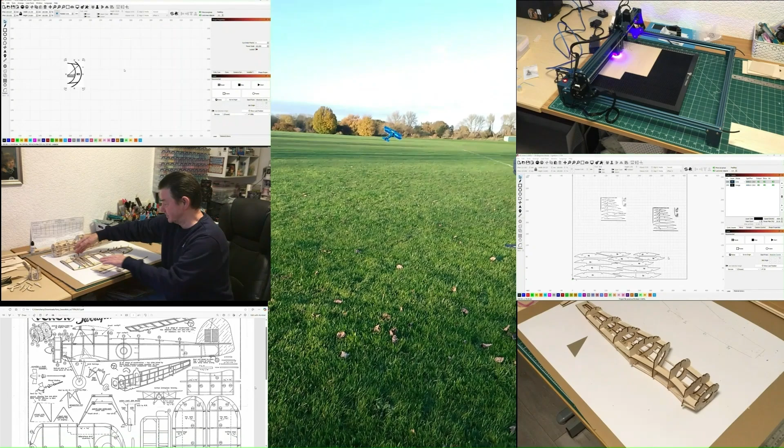Okay, so we're going to start building the tail plane, or the rear stabilizers. The tail plane would be the horizontal stabilizer, and the fin and rudder would be the vertical stabilizer.

The way to calculate the size and positioning of the tail plane would be using mathematical calculations such as tail volume coefficient for the tail plane, etc. But we're not going to do that, because we've followed simple rules for the aeroplane, the fuselage, and the wing. We're going to carry on using simple rules for the tail plane and the fin and rudder.

So the tail plane should be somewhere between 20 to 25% of the surface area of the main plane. Whatever the wing is, the tail plane needs to be 20 to 25% of that generally, depending on the length of the fuselage, etc.

But since we've gone with simple rules, we're going to maintain those and carry on in that vein. So the fin and rudder, or the vertical stabilizer, needs to be 10 to 15% of the surface area of the wing.

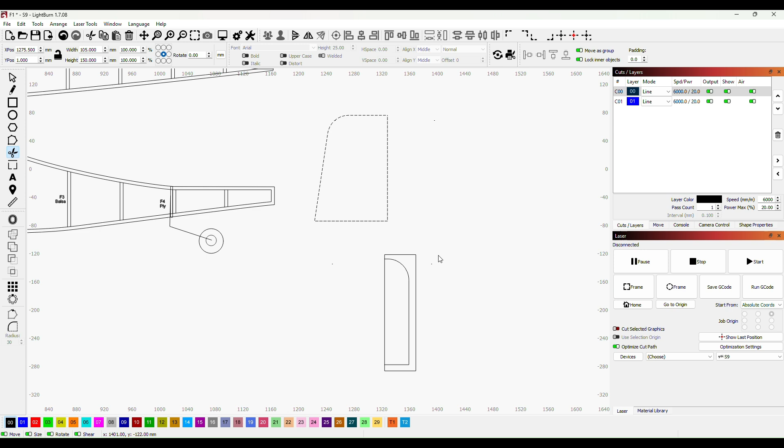And then all we're going to do is copy that, produce another, and using the snipping tool, I'm going to create our two components here. And it's as simple as that.

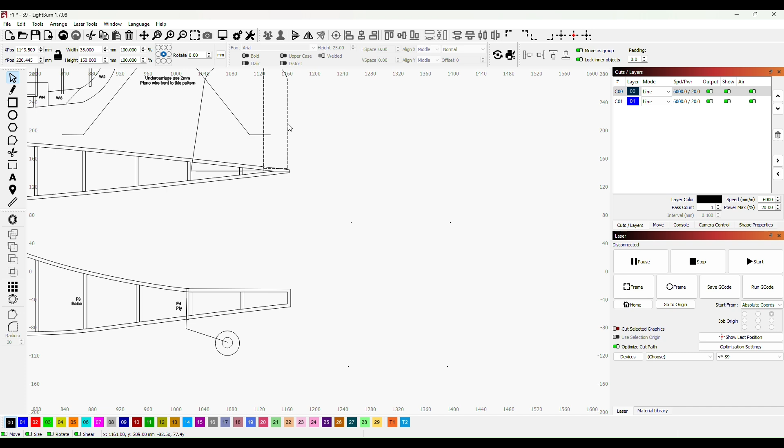Where this is going to sit on the fuselage, what I want to do first is just shape this front end a little bit. I'm going to go to nodes, insert a node here, and straighten that so we've got a straight bit which will sit up against our edge, our stop, when we finally build the fuselage.

And at the back here, what I want to do is make a little bridge there. Now this needs to be 5 millimeters wide, which it is. The reason I'm doing this is because I'm going to have a strip of carbon coming across here connecting both sides of the elevator, and that strip of carbon I've got is 5 millimeters wide.

So all I'm going to do is bring this shape up, and sit it right there, and that goes outside of the shape of the fuselage. Probably doesn't need to be quite that big, but there you go, that will do.

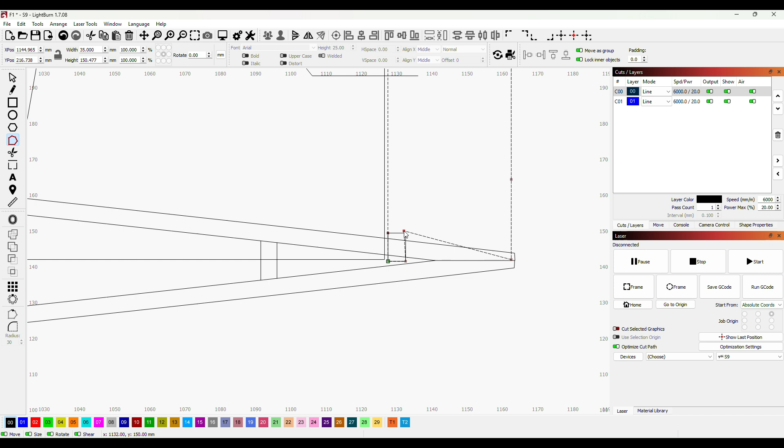And then I'm going to go back to nodes, insert a node, and insert a node there. I'm going to insert a node here, insert a node here, and then delete that node by highlighting it and pressing D, and then we get the shape of our elevator forming there.

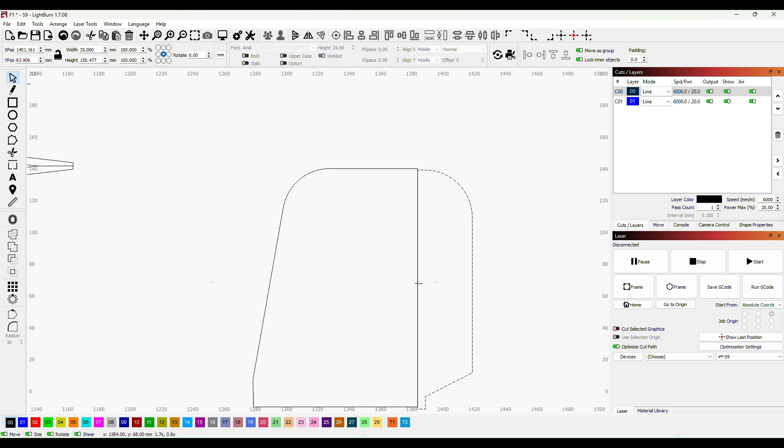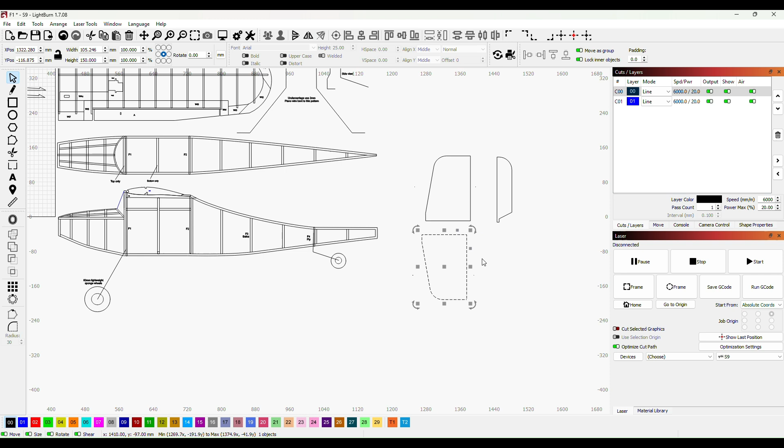So what I've got now is the overall shape of our tail plane, or horizontal stabilizer, along with the shape of our elevator. So if I just separate these two, copy this, produce another and flip that, I can then bring these together.

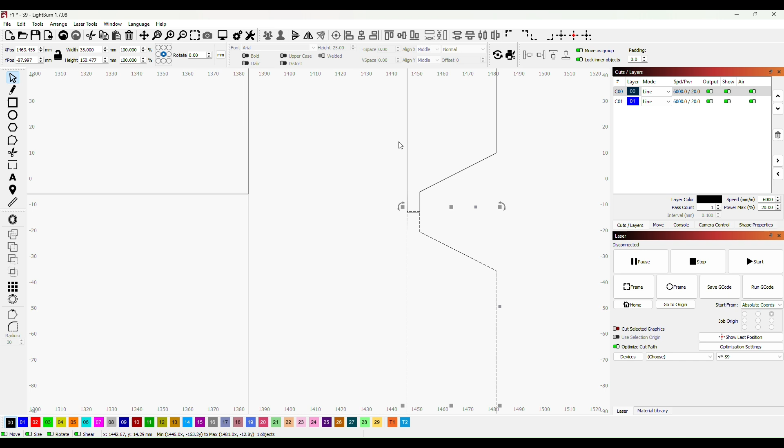So control, copy, control, and then I flip this one, and in exactly the same way I can join those together. And they're now welded together.

Okay, just like that. So what we've got now is the basic shape of our tailplane, and if we just have a little look, we can place that straight on there, and it looks reasonably sensible in the overall size and shape of that aeroplane. So quite happy with that, and from this now we can start building or shaping the components that are going to make up this tailplane.

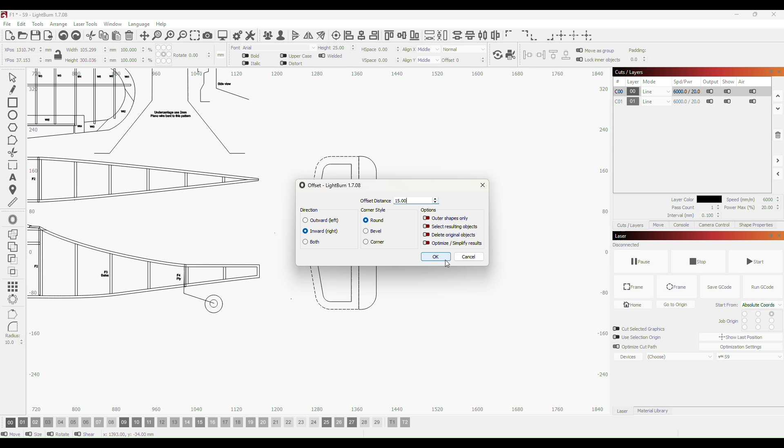Okay, so next we're going to make the components that will make up the main tailplane. The elevator will be one piece of 1/8 balsa, or 3.2mm balsa. So if we go to our offset tool, I've set this for 15mm inward, so we've now got this 15mm shape all the way around the outside.

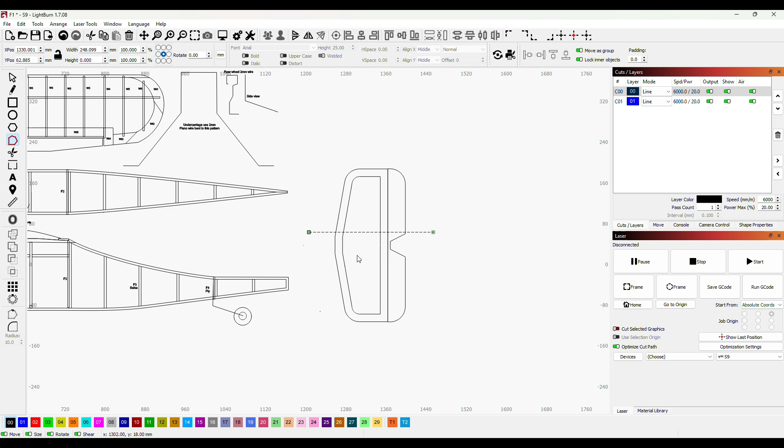So then all I want to do is make a line, go to nodes, go over that line and press A, which makes it dead level, and then center that line by bringing it over - as soon as it's centered it shows you crosshairs with a little circle, meaning you're dead center. The other way is to highlight everything and press the center button up here, that would also center your line. But okay, that's where we are.

So next, using the line tool, just extend this back straight up like that, because this is just going to be a piece of 15mm by 1/8 balsa.

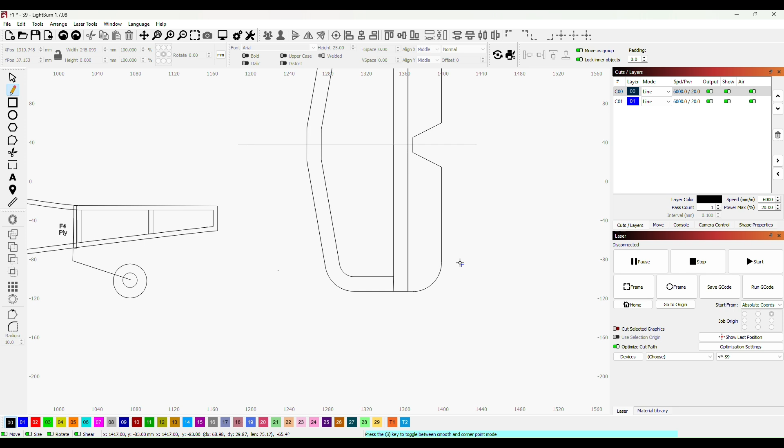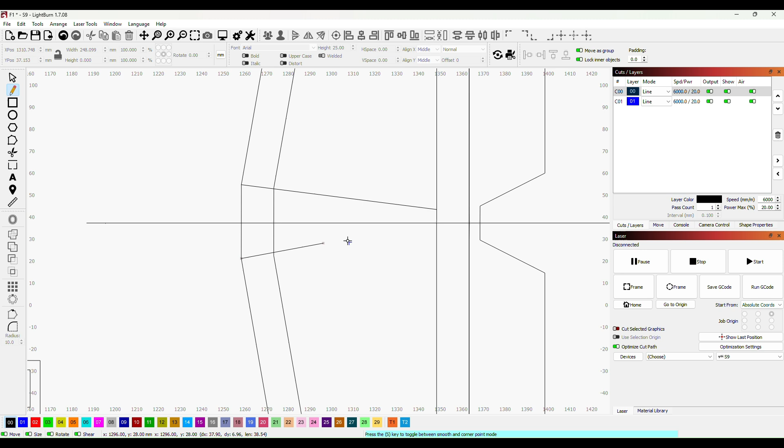Okay, so our components will be from this corner here. We need to make sure we can align everything with the grain on the balsa. So using the line tool, from there I'm going to come across to there - that will be one piece. Then from that corner point, bring it in to a point on the back trailing edge, prior to the elevator, the back edge of the tailplane, and do the same over there, checking we are right on that corner and right on that corner.

Okay, so with that done, we can now start snipping away, and to be fair, we're not really going to need the center line now.

It was there just to help me as a guide with this back edge here, so that I could check that they were the correct distance away from each other. And that's really the components.

So I'll just copy this one and put it down here as well, and the way I'll do that is I will go to our line tool, I'll just change the layer so that we can see what we're doing. It'll have a slightly different colour, and then all I'm going to do is go from there and follow around.

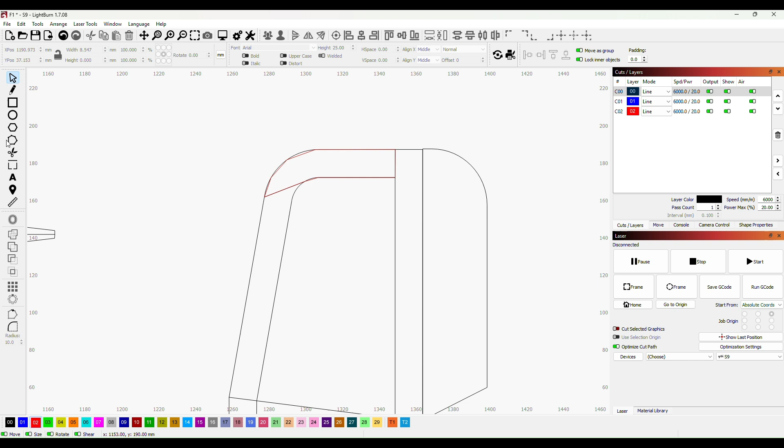Okay, now if we go to nodes, I will insert a node there just by hovering over it and pressing I, and then I'll just drag that, and that will give me a smooth curved node there, by just dragging the line.

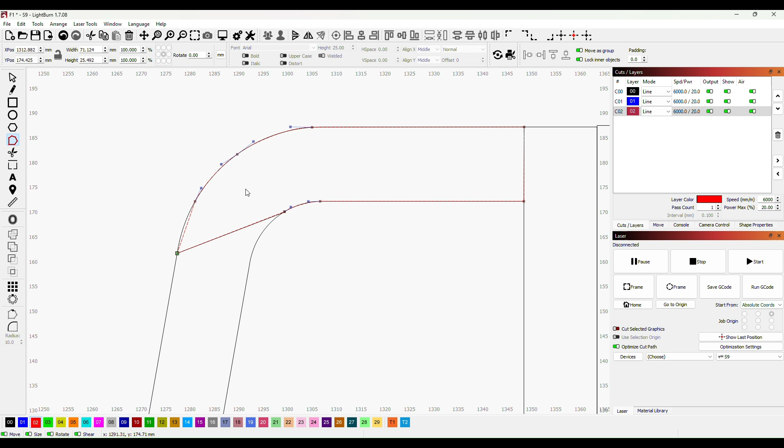That's a quicker and easier way of creating that curve, because it puts a curve to the corner nodes that you've already got, and it's just a quicker way than the way that we've been doing previously, where we've been using the smooth curved nodes. So you just grab the line and drag it, and you can see that that's now perfectly sat on there. So that's one of our components.

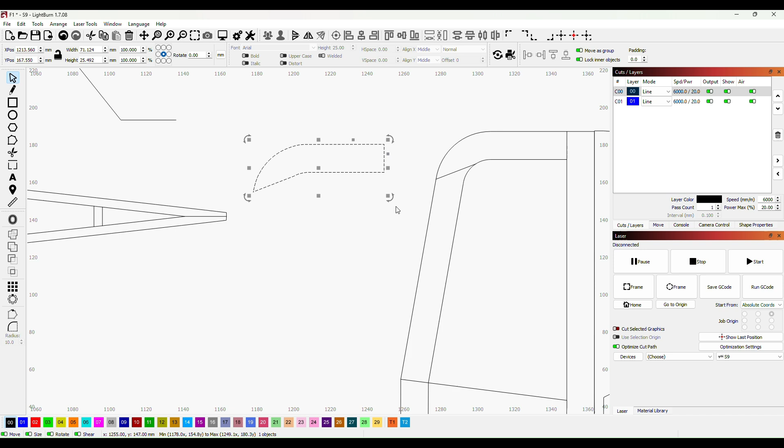So all I do with that is just bring that away, and I'm going to change the layer so that it becomes a cut-in layer. I will now copy and create one for the other side, which I will flip, reduce the height of our letters to 4mm, and we'll call that T1, and this can be T1, and you can see that that one will fit.

Just group those. And you can see now that this one will fit straight in there. I'll just label that up as well as T1.

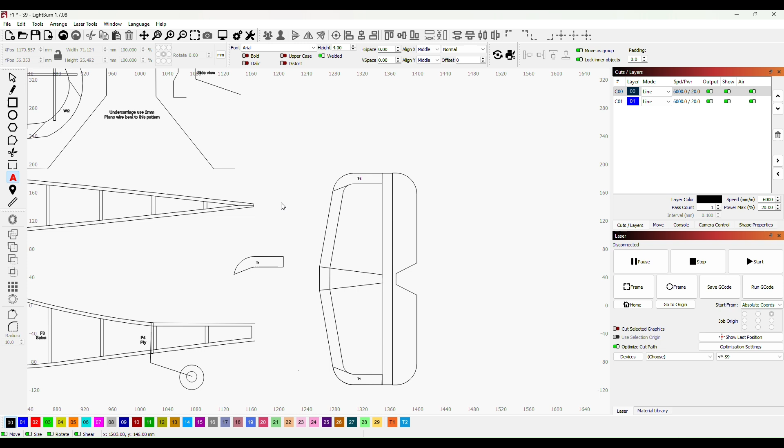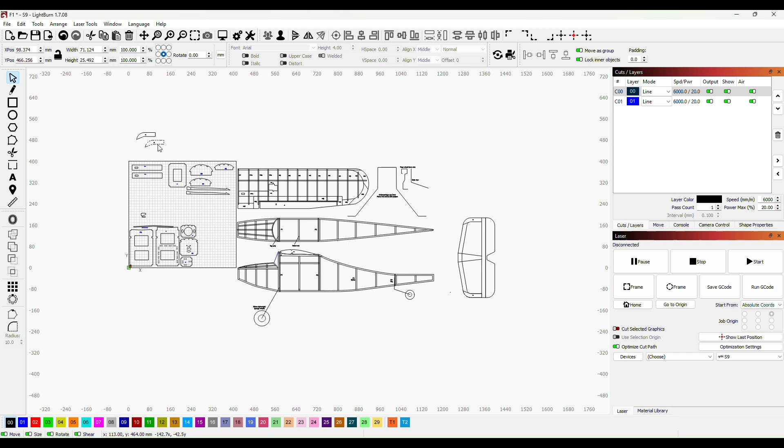Okay, so if we come over to our cutting area or our planning area, bearing in mind that this will be 1/8 balsa, all we want to do there is create another copy of that. So Control C, Control V. I've now got two of those, and I'll just make the other components up now. Just snip that little bit out there. Okay, so these parts here I want to make in exactly the same way.

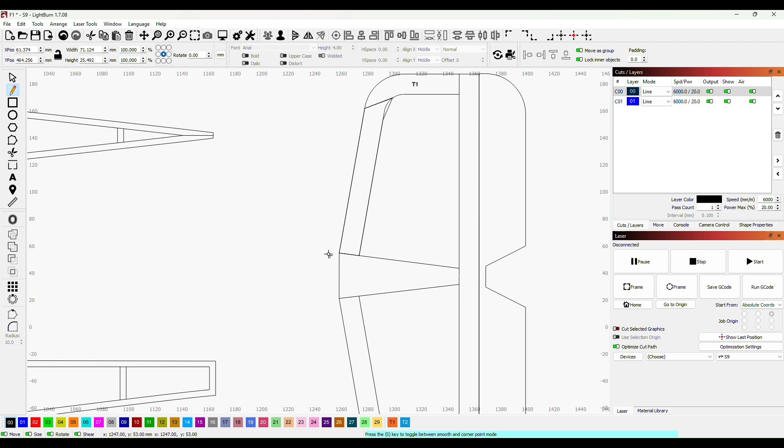Okay, then we'll go to nodes, and all I'll do is then drag that and grab it and bring it in, as we did with the other one, and that will be T2. I will group, and I'll just drag it over here to where I've got the other components, and Control C, Control V. We've now got two of those as well.

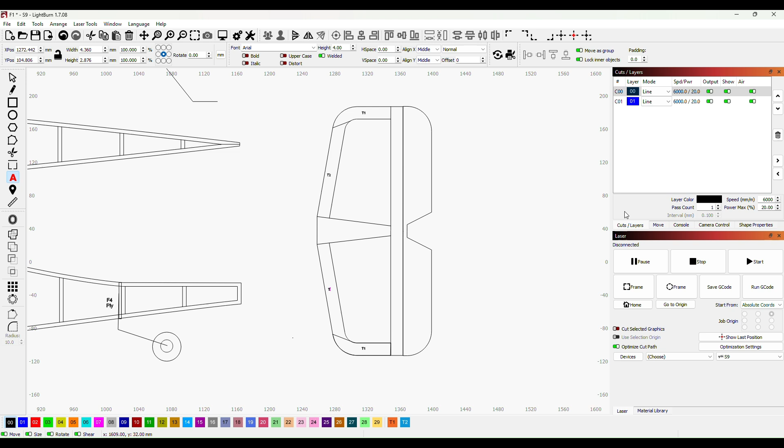So if I come back to the tail, I name that up T2. T2. And then just create this last piece, exactly the same way. And we can call that T3. And we only need one of those. So I'll just label up T3 on the plan.

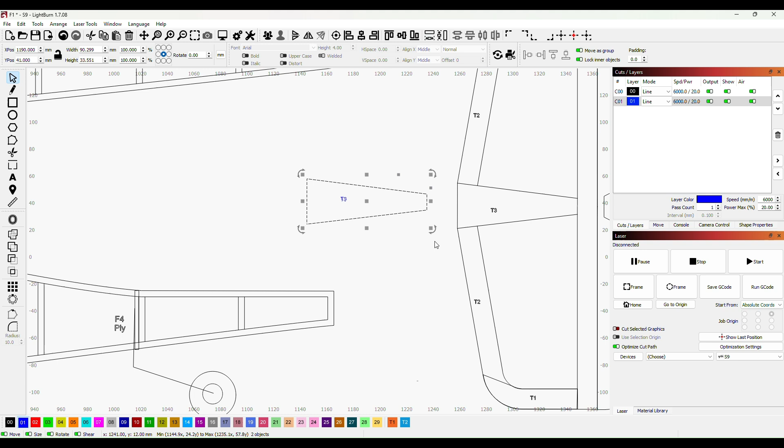In fact, before I group it, let me just change the layer to our engraving layer, and I'll need to do that with the other components that I've just created as well. Group that, and that is the main components now for the tail plane created.

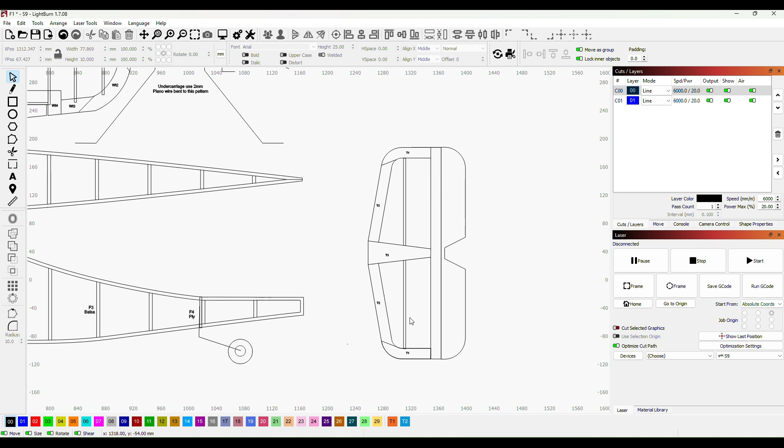The next thing to do is I've put a 3.6mm spar right across the wing, and the reason for that is I'm going to mount our wing ribs or formers onto that spar. All I'm going to do is create a shape just like that, convert it to a path. So right click, convert to path, and then I'm going to select nodes, and we're going to start shaping this now.

So if I insert a node around 2/3 of the way along, and then just bring that up, convert it to a smooth curve node, just like we did earlier with the main wing. And then all I'm going to do is reduce this side down, and I'm going to reduce this end down as well.

Now on the last former we had a bird's mouth at the front which sat into the leading edge, but this is going to sit on top of our 1/8 balsa frame. So all I want to do is make a little shape 3.2mm high, so 3.2, and it doesn't really matter how long it is at the moment, and I'll show you why.

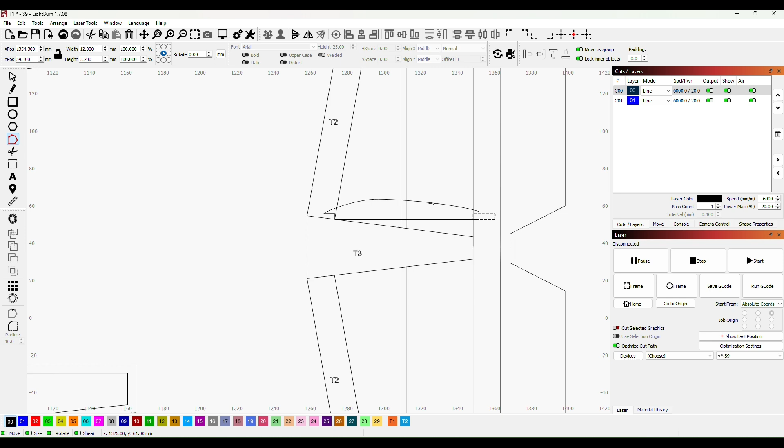So bringing this shape now to the back, I can do exactly the same. Put that shape so that it touches the bottom of the former or the rib, and I can now come back to nodes and do exactly the same again. Insert a node here, and then move this node to that corner there.

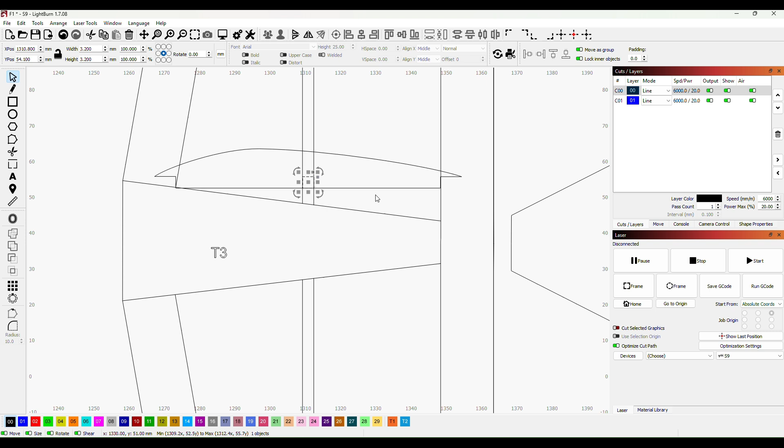Can convert this to 3.2, a 3.2 square, and I can just place that straight on top of our new rib, just there. And then if I just bring those away from there so I don't snip the wrong bits. And then all I want to do here is, if I select that and just bring it across the line, I can get the snipping tool, snip that, and we've now got the shape of our central rib there.

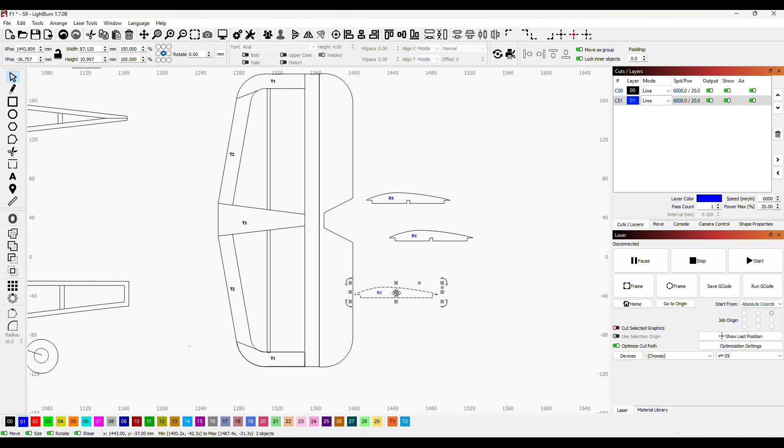This doesn't look very uniform there, so I'll just go back to nodes and we'll have a little look at that, what's happened there. There, that might be a little bit better. Okay, I'm going to call that R1. Control copy, because we'll need 2 of those. So there's 2. I've got a third because I'm going to use that to make the shape of the rest of the wing.

But what I'll do with those two first, I'll just shift them across to where our 3.2mm components are, and I'll be putting these all onto a planning sheet in a little while.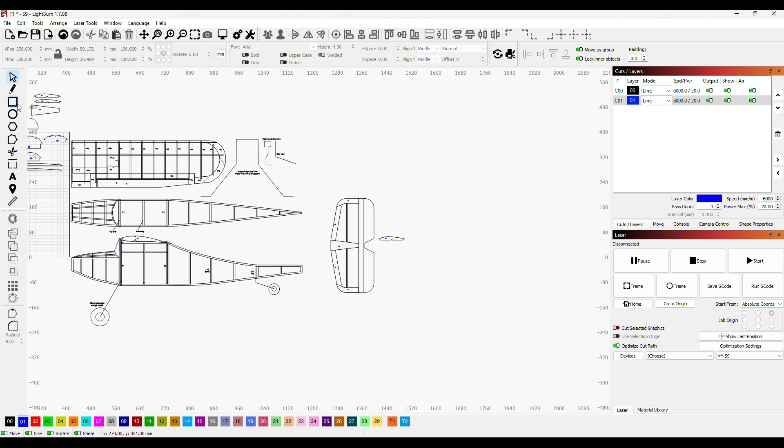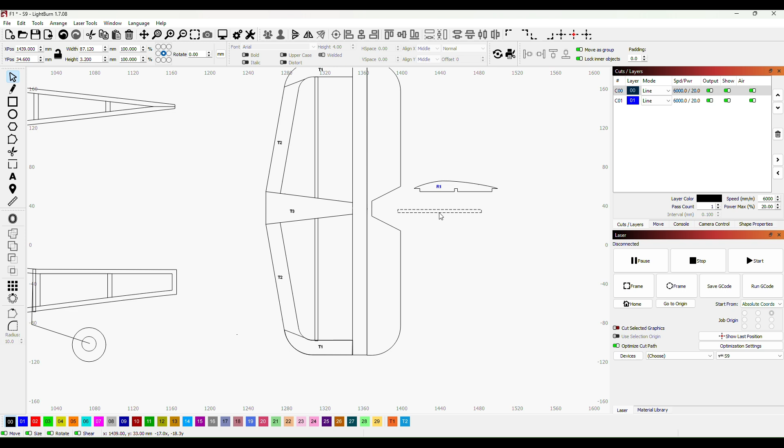With regards to the tail itself, I need to start marking up where these ribs are going to sit for our main plan. So if I make that 3.2mm high, and I'll make the length identical to this, so that is 87.12. So if I make our thing 87.12, then that's exactly the same. So all I need to do is put one of those there, and put one there as well. So I'll just put that in exactly the same place,

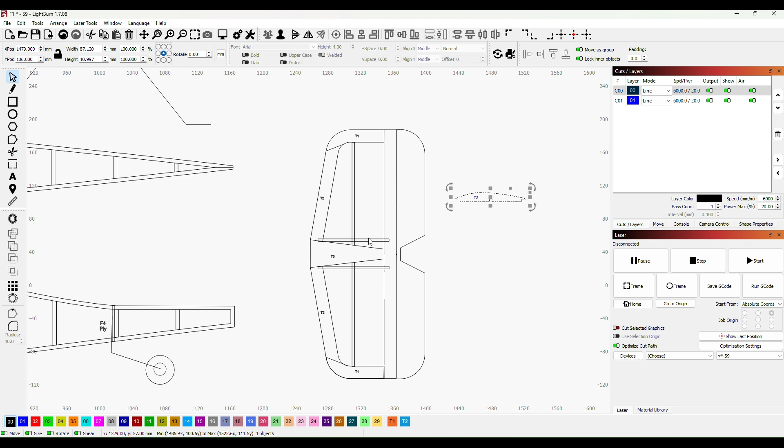and I can just check that positioning by overlaying the rib, line that up on the central spar, and just make sure that these ends are in line, and they look spot on to me. Okay, so I think what we need to do is work out how many ribs we need, and then set our distances for them.

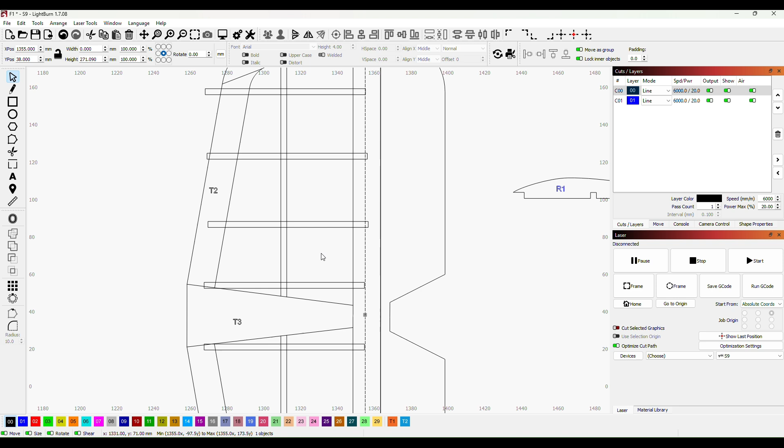I'll just create a straight line, make sure that we are vertical by selecting nodes, clicking A. All I need to do with that is bring it across and use that to line up our ribs at this end. Now our distance from here to here is 102, so I'm going to make a line. I'm going to make sure it's upright by pressing A when the nodes are on and hovering over, and then I'm going to make the length of that 34mm, 34, and I'm going to use that as a measuring stick.

So from the front of one to the front of the next, just like that, just to make sure they're right on the plan. Okay, and they were all pretty close, just one needed moving. Now what I want to do is align this rear end just here to make sure that that's in exactly the right place.

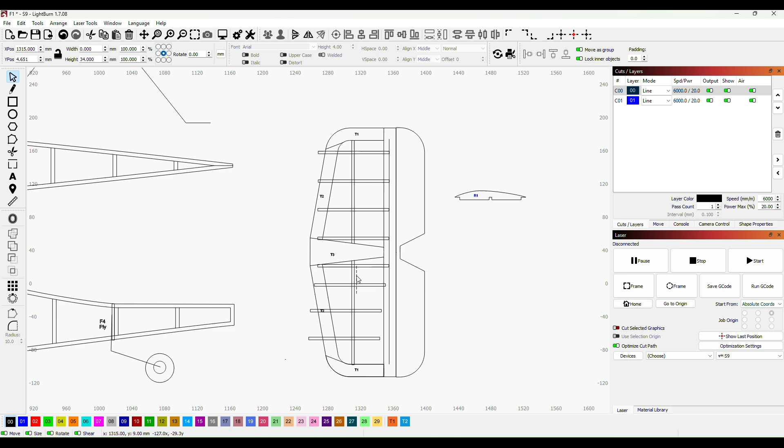Okay, and then I need to do exactly the same down here. So what I'll do is I will set our distances in just the same way. Okay, so what I'm going to do with this now is just use this to align the front of our

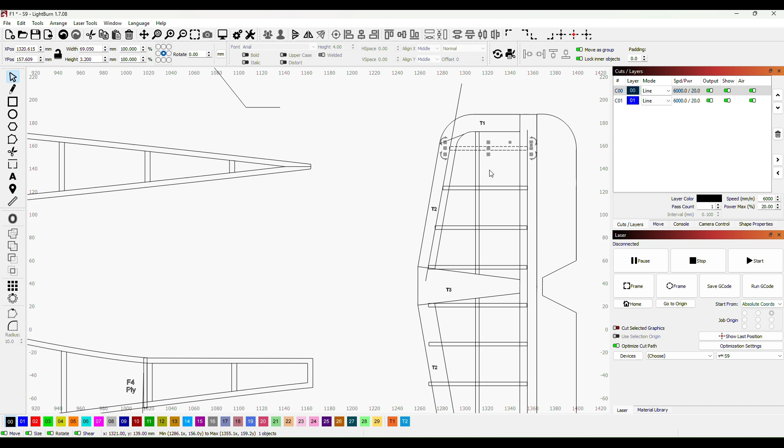formers or ribs. Now all I've done here is just made it parallel to the front leading edge, and now all I'm going to do is take it back until it touches the front of this rib, and then all I need to do from there is just take these ribs in just like that. And this will help us when we get our plan printed and we actually build from it. It will also help us, as we're making the new ribs, to set the point where the cut-in for the spar is on the ribs.

So if I just flip this over, I can now bring it down and do exactly the same on this side.

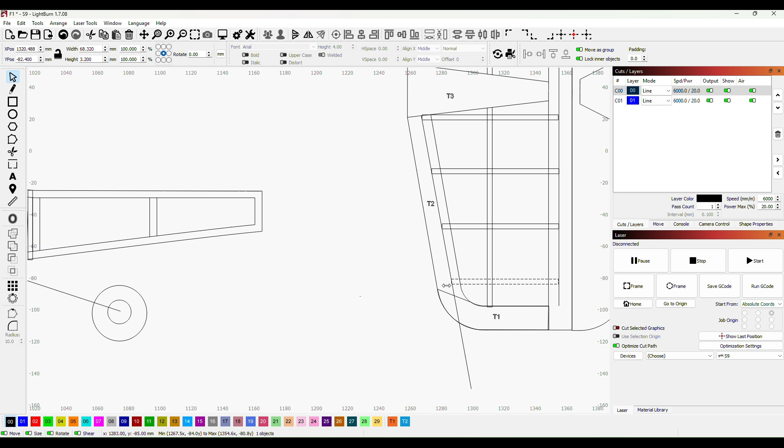And the reason for doing all this is because at the end of the whole process, I want to end up with a proper full-size plan as well, all written up, one that can actually be used. So this rib here is going to be R1, and then I'll come down here and put R1, and then R2, R3 and R4.

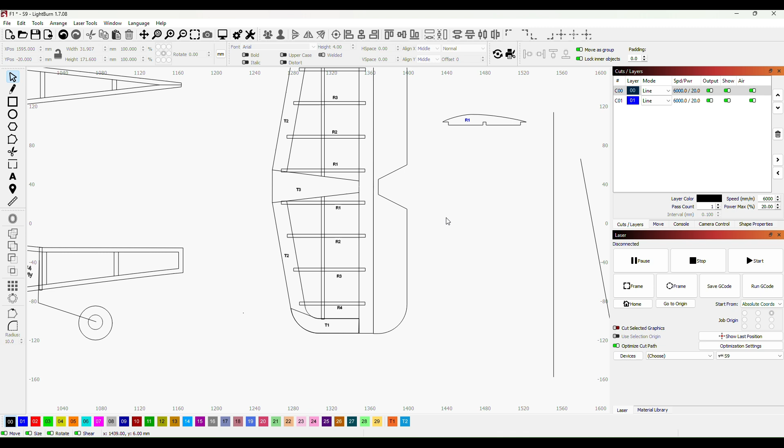Okay, so having done that, I can now remove our straight edges that we've used. Just get them out of the way for now. And all I want to do is bring that and put it straight on where R2 is. And what I want to do is, using this corner function here, I want to bring the size down so everything shrinks accordingly.

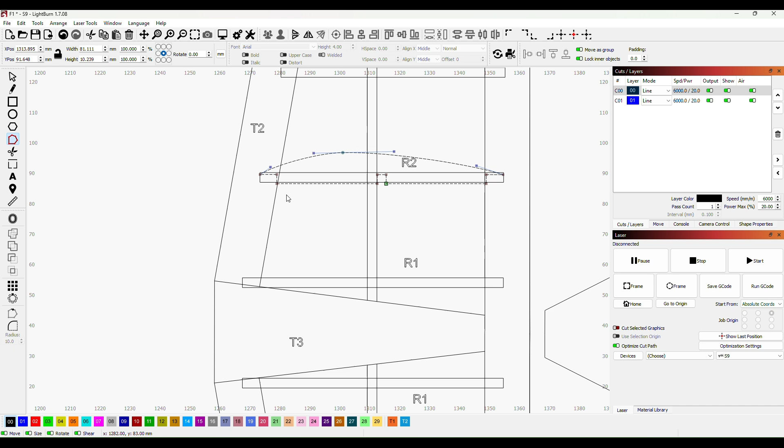And you can see how the back edge there has stayed on where it's supposed to be, and this edge now, I just want this top corner here to be touching that line, whilst this top corner here is touching that line. So the way I'm going to do that is I'm going to get this point here where it's supposed to be, and this point here where it's supposed to be, and they both are. And then if I go to nodes, I can then make some small adjustments here.

If I select all four of these and then move them across, they'll all move across together, and I won't have the problem of keeping them all in the right configuration. Now, because we've shrunk the whole thing, this is no longer 3.2 millimeters. So what I need to do is take these two nodes here, and I'm just going to take those across a little bit.

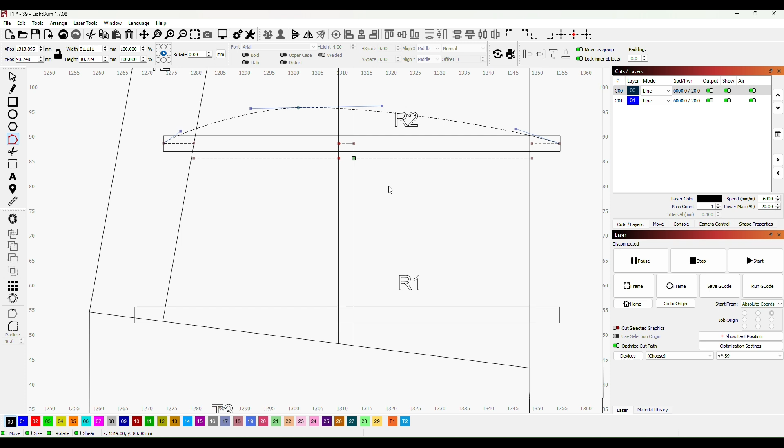Okay, so having done that, I'm going to now just bring this over, and using a 3.2 millimeter square, I'm just going to make sure that we've still got the right height. If I line that up with the sides, just like that, and then take it up so that this bottom line is level with our bottom line here, I can see that we've actually shrunk the top as well.

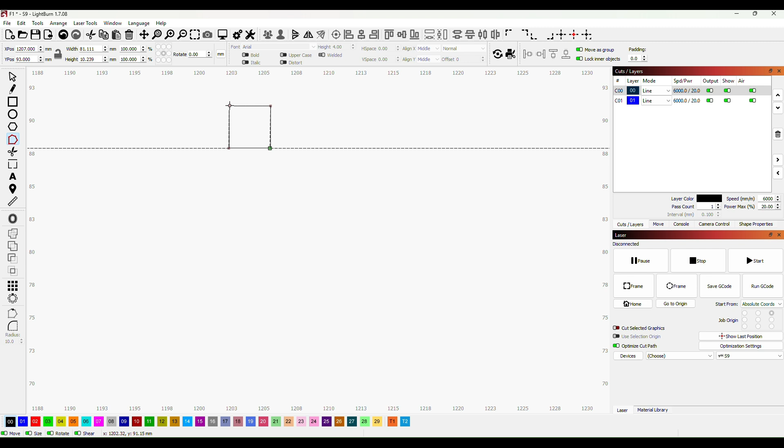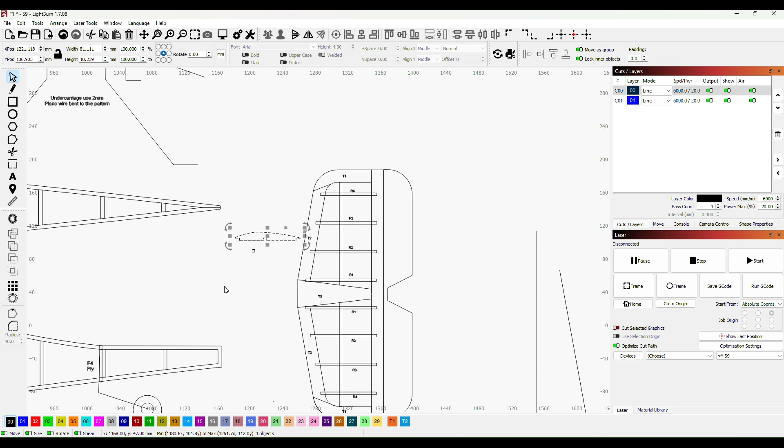So if I go back to nodes, what I can do is just bring that up to the top corner like that, bring that up to the top corner. I now know that that is spot on. So if I Control C, Control V, make a copy, and I call that R2.

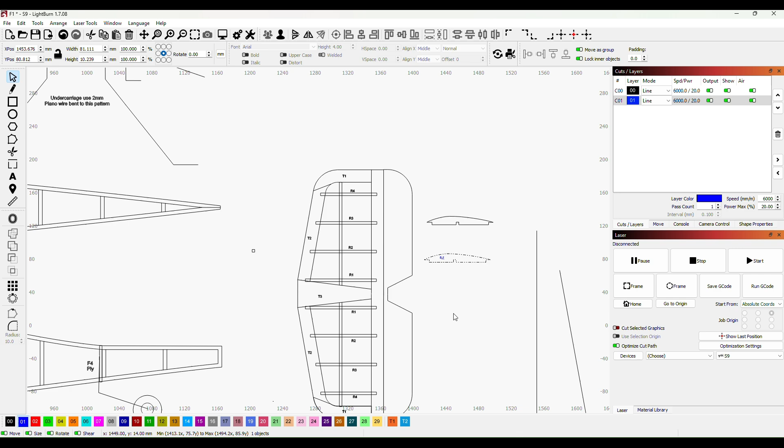Make sure that that is the correct layer, engraving layer, group. Then I can take that over to where we're just storing these for now. Control C, Control V, and I've now got R1s and R2s done. So all I've got to do now is exactly that same process to produce R3 and R4, and I'll show you them when they're finished.

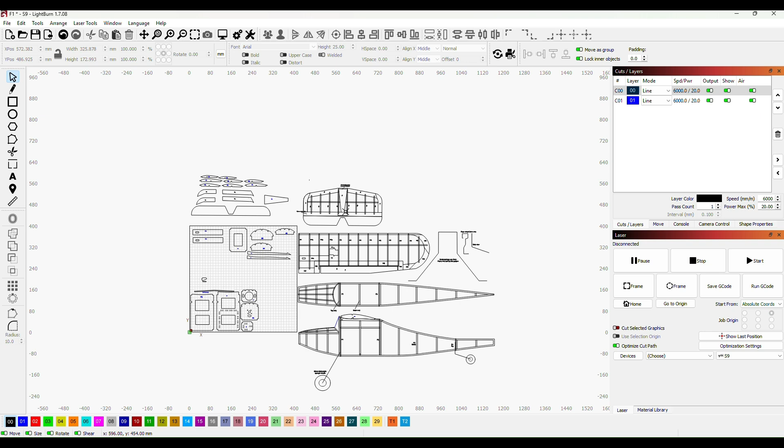So I've arranged these components over here, and I've now put the tail plane on the plan where I want it to finally sit. So the next thing to do is for us to make our vertical stabilizer, or the fin and the rudder. So I'm going to make that the same size. It's going to sit straight on top here of the tail plane, and if we come in a little bit closer, you can see that over the top of these two ribs there's going to be a piece of 1/16 balsa, or 1.6mm balsa, in order to support the stabilizer. So we'll have a look at that when we're forming the bottom of the stabilizer.

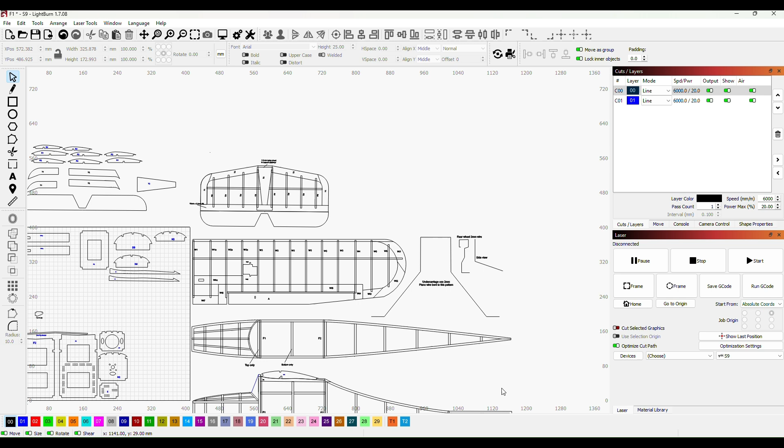But in essence, we're going to be 140mm long, so it's going to be the same size as the tail plane. And come off there, we'll convert that to a path. Convert to a path, and we will just go to nodes. Okay, so I'm thinking something like that might be reasonable.

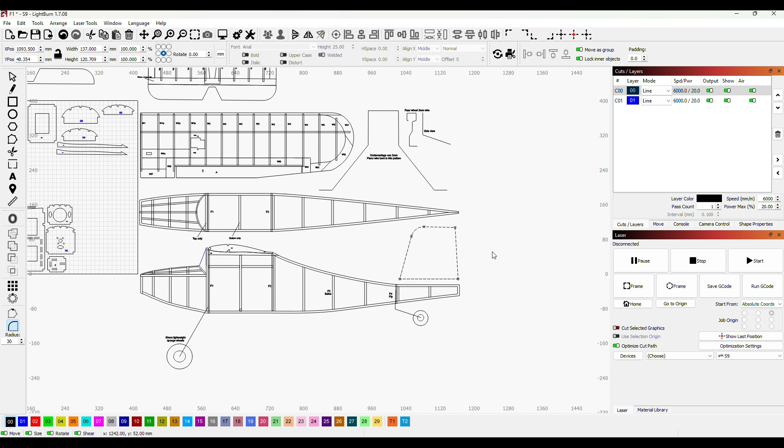And then if we go to our radius tool, make that radius a little bit bigger than that, I think maybe go to 30 on our radius, the radius there at the front, and then maybe the same at the back. And I think that looks quite sensible, quite reasonable.

The actual rudder now, I want that to be the same size or the same width as this elevator here. So if I just create a square, or just create a shape, and I make that width 37, and then all we need to do is what we did earlier. We bring our elevator shape in, copy everything, Control C, and we'll just shift over to this side a bit and do Control V.

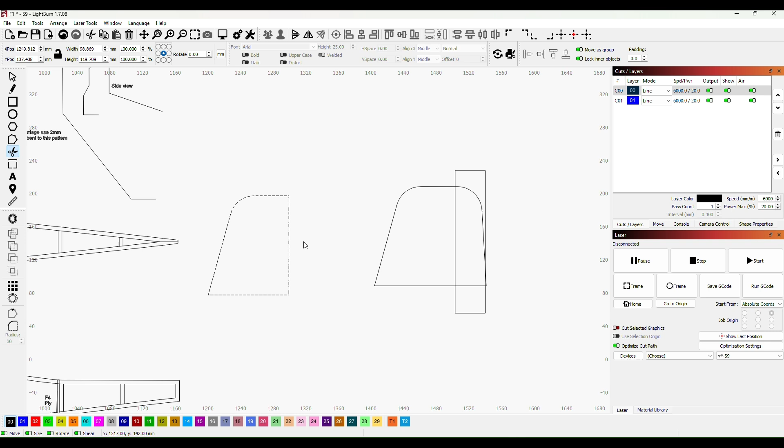And then with our snipping tool we can now snip that away so that we've got the fin, and then if we snip those away, and then let's just have a little look here. I want to get rid of that one too. And then we've got this shape here of the

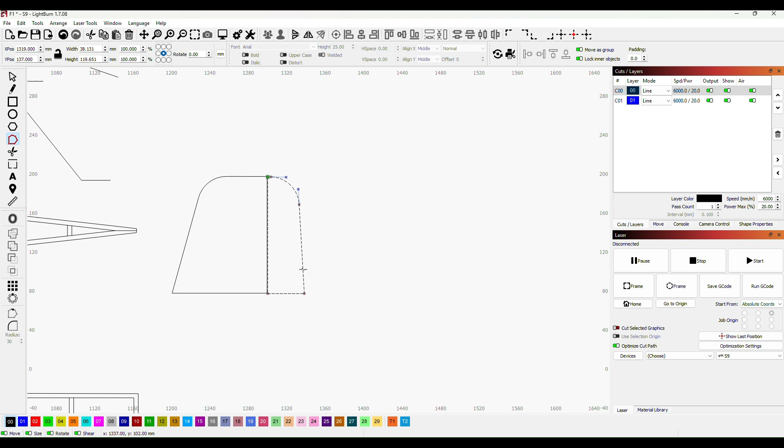rudder itself. Now if we go to nodes and we insert a node here, so all we do is hover over the line and press I, that inserts the node, and then if we select this node and then press D, that will give us the shape of our rudder. And this angle here will give us clearance should we be using the elevator at any time when the rudder's turned, and that will look more or less like that when it's sat on top of the wing.

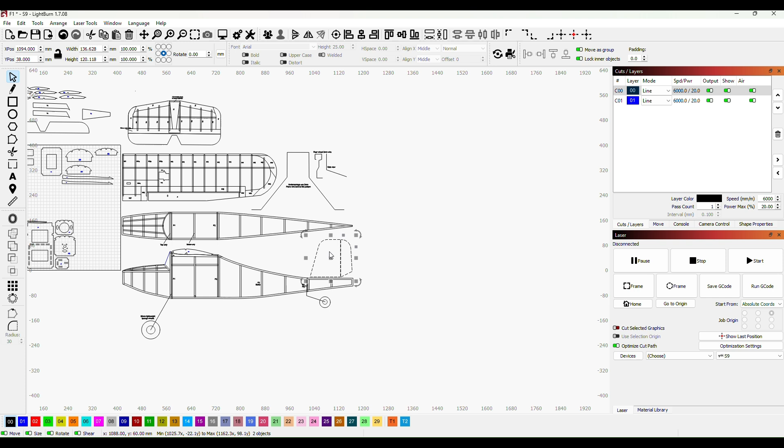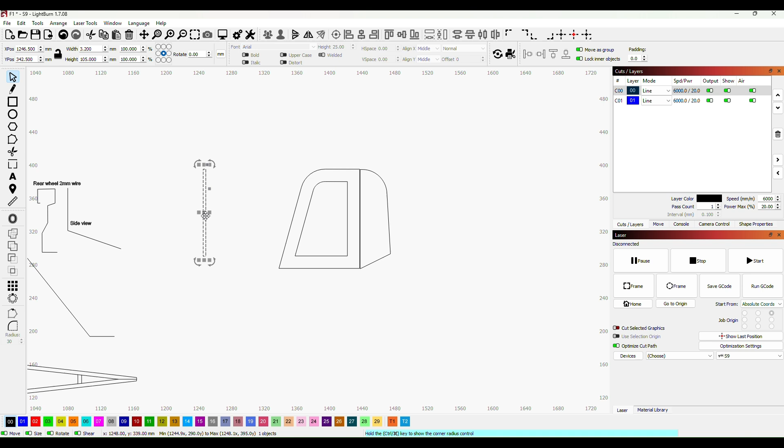Okay, so the next thing I want to do is I want to just draw out the pattern of what this is going to look like on the inside. So if I select that and I bring our offset tool, and we're coming in 15mm again, just like that, and then all I want in there is just a cross of balsa, so it'll be 3.2mm, 3.2 millimeters, and that will sit straight in the middle there, just like that.

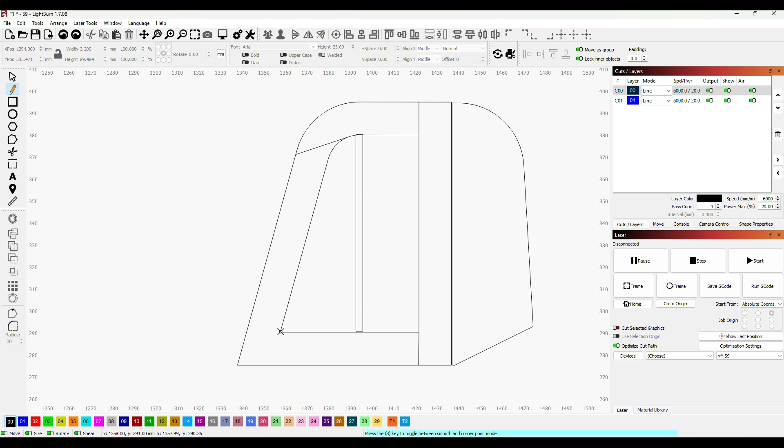Now our components, again, I want to go exactly with the grain. So this back piece here will be a straight, I want to go with the grain of the balsa. So that'll just be a straight piece of 15 millimeters cut balsa, and then this top piece here will be aligned to go with the grain, and there will be the parts of the fin stabilizer and the rudders at the back there.

Now I've just thought, what I think I'll do here is I will embed that into these pieces. I think just place it there and then use our snipping tool to just snip out those parts there. There we go. So now we'll be in a position where we can put our piece of balsa straight in, and it will fit nicely into those slots in the tail.

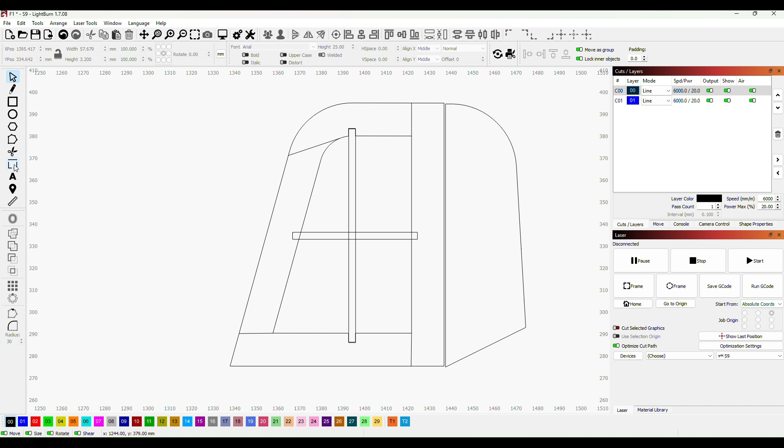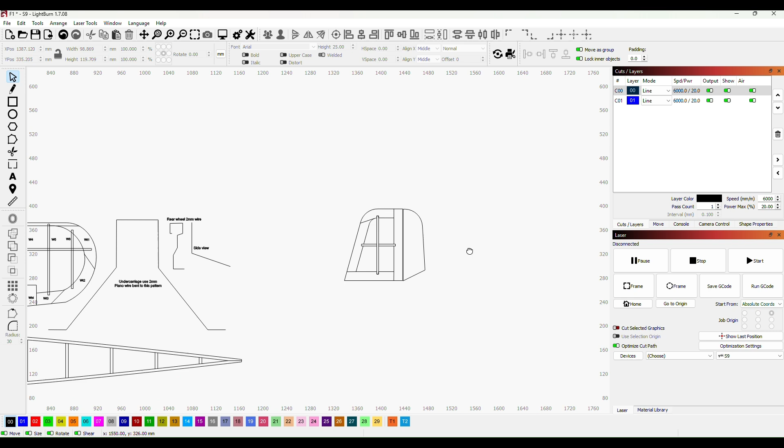Okay, so next I want one coming across. So exactly the same thing, and that will just be in the center, just like that, and I'll let it into those parts just in the same way. So with that in mind, I'll just go to the snipping tool and I will snip that out, snip this and this out, and then I will snip that out. And there we go. That will be what the fin looks like. So the last thing to do with this is for me to actually cut these shapes out.

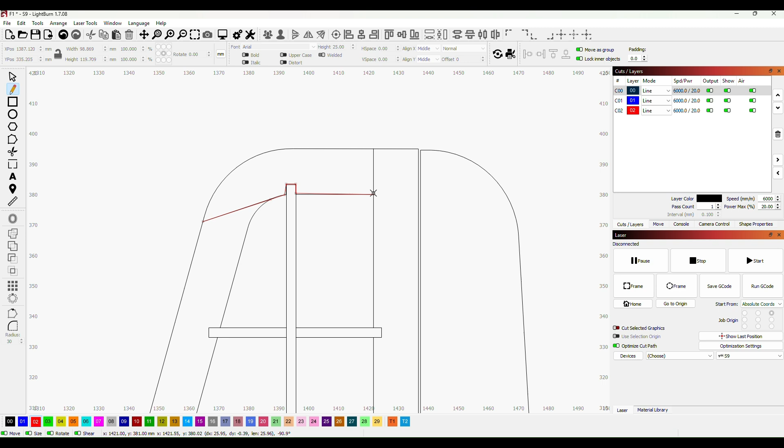So the way I'm going to do that is I'm going to select the line tool. I'm going to click on a layer there, layer 2, just so that it's a different colour so we can see what I'm doing. And all I want to do is come across to there, and then to there, to there, there, and just follow the pattern around. We'll make these a little more precise in just a minute.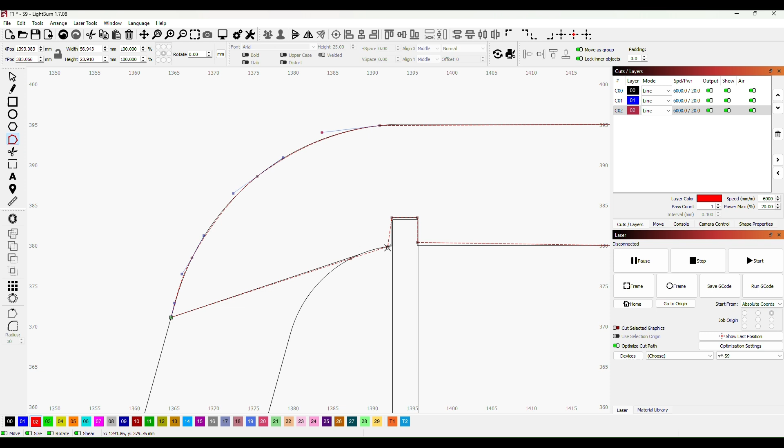Okay, so we just go to nodes, we select our thing. Now remember, all we need to do now is grab this line and pull it out until it's absolutely bang on where we want it to be. So very straightforward. Or you can convert these to smooth curve nodes, and we can do our adjustments that way. Okay, so a little bit of tweaking to do here.

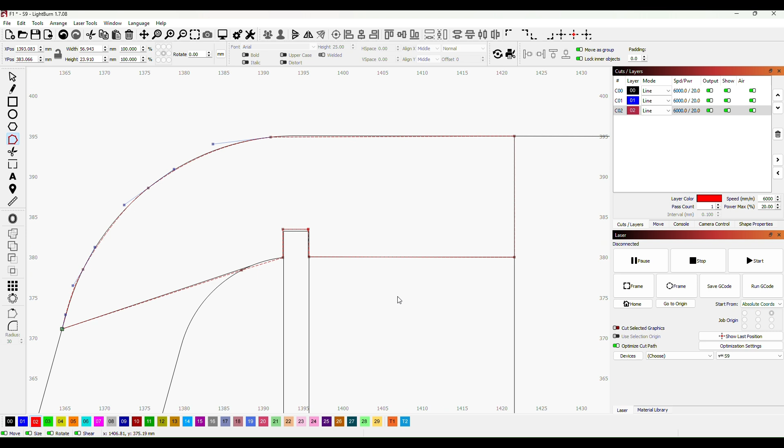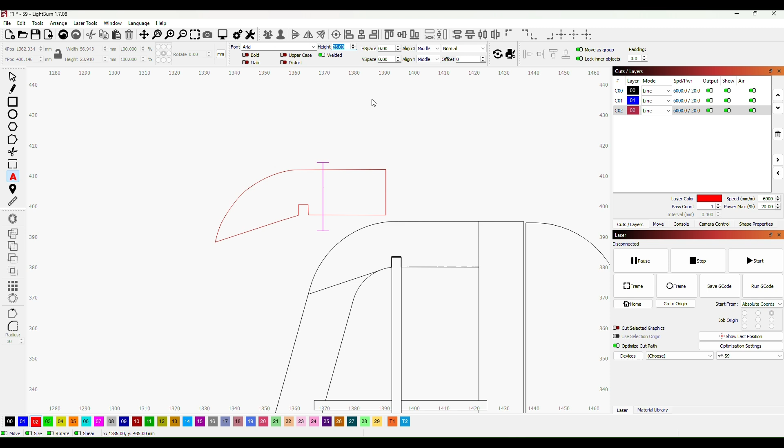Okay, so I think that's that component finished, and we'll call that F1, I think. Just group that, and that's F1 finished. Okay, so that's F1 complete.

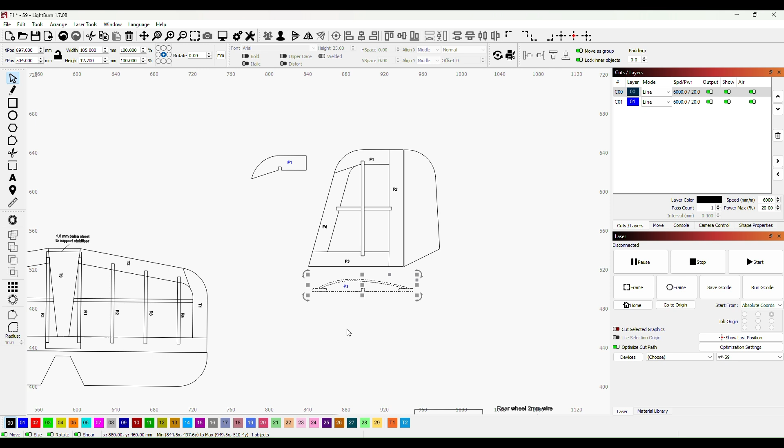Next, what I want to do is produce the shape of F3 and the edge of F2, which is going to sit straight on the tail plane. So what I've done here is I've got a copy of R1, which is this central rib over here, and then there's a sheet of 1/16 balsa or 1.6mm balsa sitting on top of that, going from the front to the back of the tail plane. And you can see that I've added, using nodes, a piece, and I've measured that with the measuring tool, and that is 1.6mm. If you zoom right in, you can do that.

So all I'm going to do is I'm going to place that under the tail, just like that, and then I'm going to go on nodes. I'm going to use nodes to adjust the shape of this bottom piece here and the shape of this piece up the side here, and I'm going to shape that so that it fits perfectly.

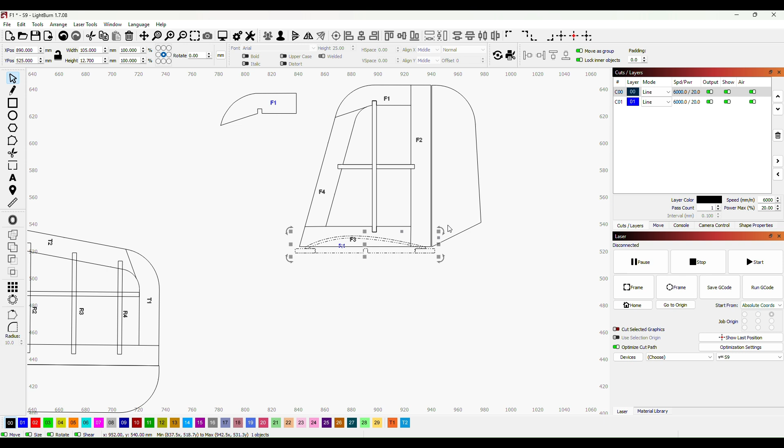Okay, so there we have nodes on this outline. So all I'm going to do is I'm going to add nodes in. So if I add a node right there by hovering over, press I, and then I'll add a node right here by hovering over and pressing I. And then all I want to do with these is I'm going to bring that down until it touches our shape there.

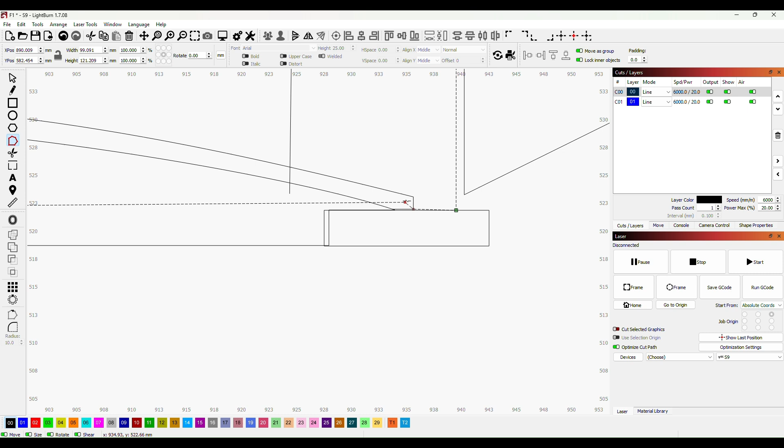Bring that one down, and then at this end I'm going to do exactly the same. So bring that down and that, and then I'm going to insert another node here, and I'm going to bring that to there, and then do exactly the same over here. Insert and bring that to that corner there. And when we come to put this together, there will be an element of sanding and just making this fit precisely.

So next, if I come to about here, insert a node, and I'll insert another there, and another there, and I'll convert those to smooth curve nodes by clicking on and pressing S, clicking on and pressing S, and then clicking on and pressing S. And all I'm going to do now is just lift these into place, and then we will just play with the little tabs that sit on them to get that into a nice smooth curve. You can see how that's now more or less following. If you just grab this bit here and just lift. There we go.

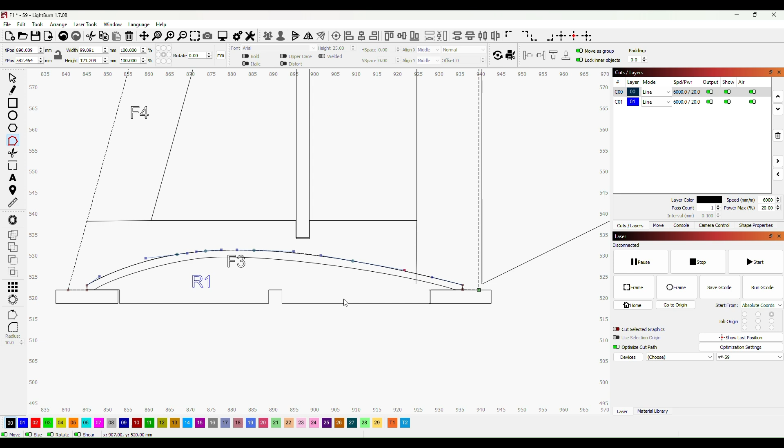And we can just tease these now and keep working with them until, see, that bit there is actually perfect, and then this one here just needs a little, there we go, and I think that will be a good fit. Okay, so we've shaped the bottom of our tail now so that it will fit straight onto the tail plane.

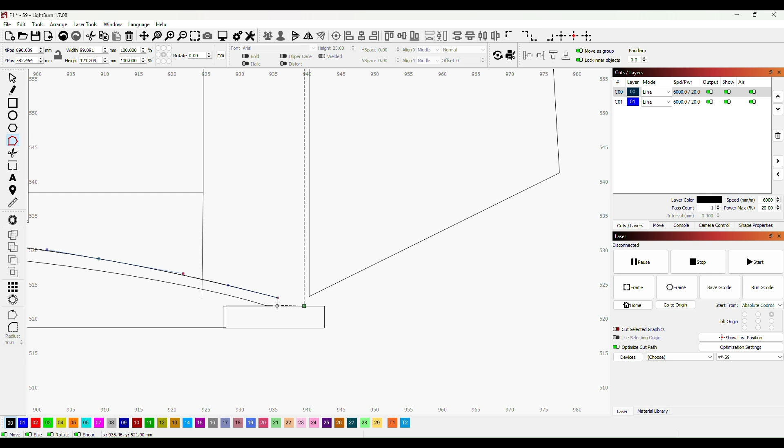Now what I want to do, this little bit here, I just want to make sure that I've got enough clearance here, because that's 1.6mm. So if I click on the tail, all I'm going to do is insert a node there, and then insert a node there, and then if I click on that node and press D, we'll just take that away from any risk of snagging when we assemble this.

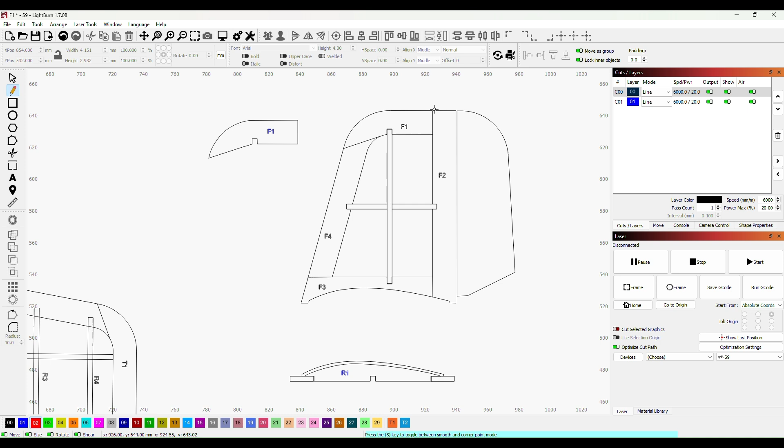Okay, so in the same way as we did F1, what I'm going to do now is copy F2, F3 and F4 just by using the line tool and then following round, and again I'll just point out that I use a different layer so that we've got an idea what we're doing. And there we go. So that's F2 shaped.

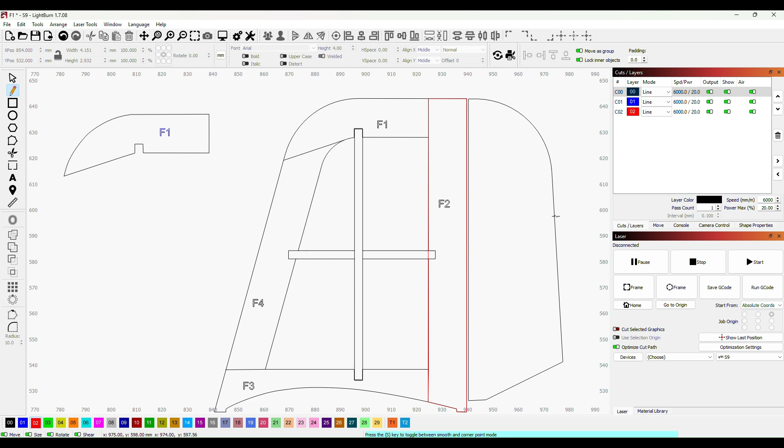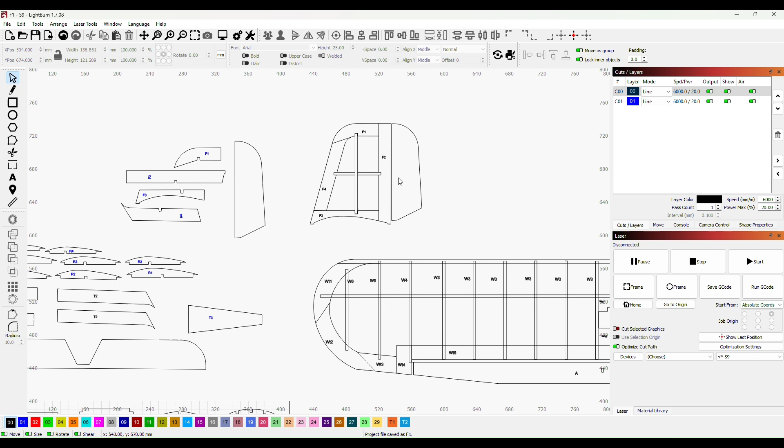Now I'll just do the same, I'll bring that over, label it up, I'll change it to a cutting layer and I'll have the label as the engraving layer. I'll do the same with F3 and F4 and I'll show you those in just 1 minute. Okay, so all the components are made up now, and I've got the vertical stabilizer completed, all shaped, and I've put that over to this side so that I can organise these into cutting plans depending on what they are.

If I just open some of the others, I can show you some of the cutting plans that we've already got. This is for the main wing, the main plane, and all the components there with the ailerons already set out. I'll just open up the main plan. I've called it plan file, and what I've done is I've organised everything onto a single sheet, and one A0 sheet will fit this. I've labelled it up and we've called the aeroplane Dixie.

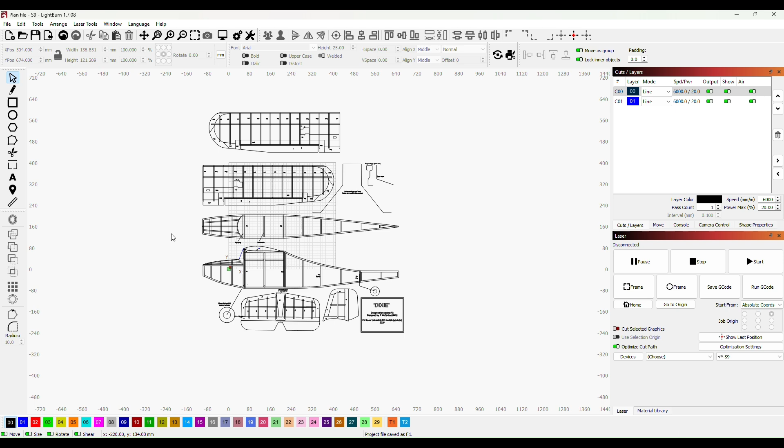I've already sent this off to the printer, and when that comes back I'll have a full plan file and we will build the aircraft on a paper plan. In the next video I'm going to send all the components to the laser and you'll see those being cut out. So thanks for watching, don't forget to like and subscribe, and I'll see you all next time.